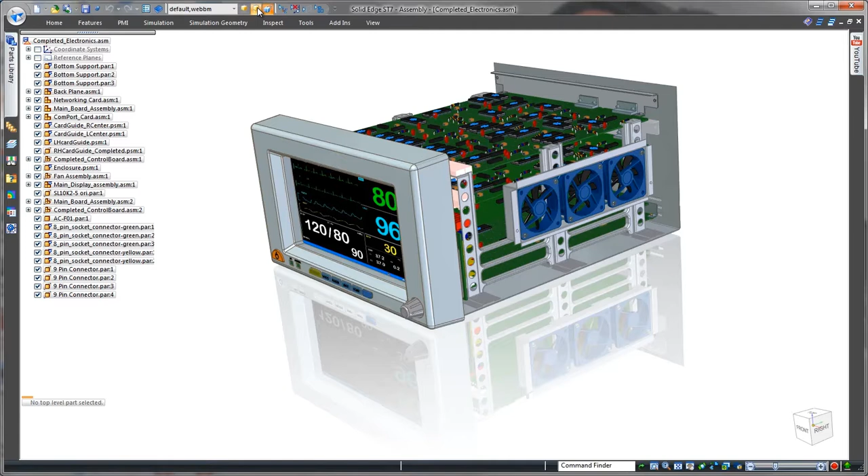We'll use Solid Edge to complete the enclosure of this heart rate monitor. Solid Edge with synchronous technology excels in sheet metal construction, allowing designers to efficiently work with surrounding components to define external product housings. In most CAD systems, the user has to modify a part independently from the overall product assembly. With Solid Edge, additional flanges can be created at the top-level assembly just by selecting and dragging the plate's thickness faces. No special command necessary.

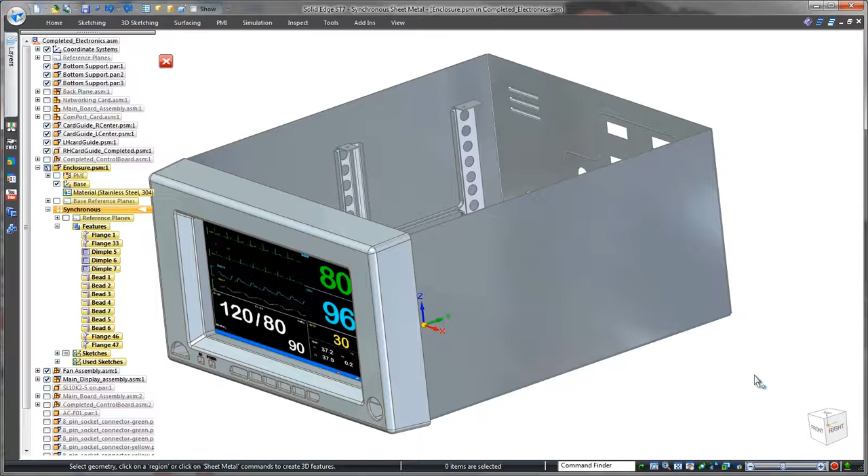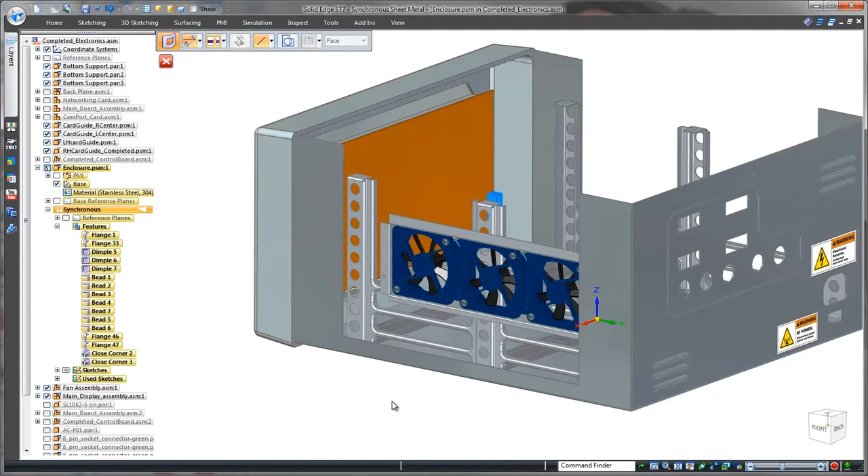Medical device manufacturers must adhere to strict government regulations, and any gaps between panels could be faulted. Using the Close Corner command, these gaps are eliminated. The internal circuitry produces a large amount of heat, so normal operation of this monitor relies on cooling fans. To provide clearance for airflow, we'll define rectangular cuts on both sides of the enclosure. Synchronous modeling provides several methods to intuitively match the size of these openings to the shape of the fan assembly. Now that was fast and easy.

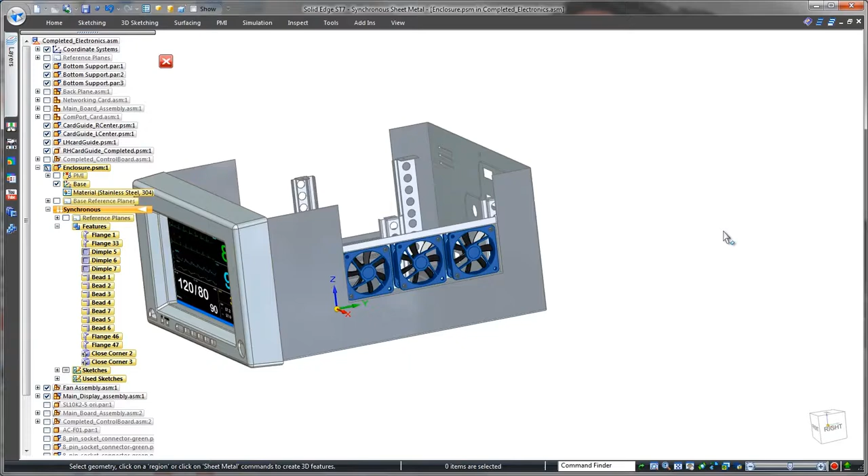Next, we need to create a locking tab for the enclosure's lid. Here we'll select the thickness face, but opt for a partial flange to create this tab. Using one of many handy options, we'll ensure its top is flush with the top of the part. We'll lock in a precise tab location using 3D dimensions. To meet safety requirements, simple rounds will remove sharp corners.

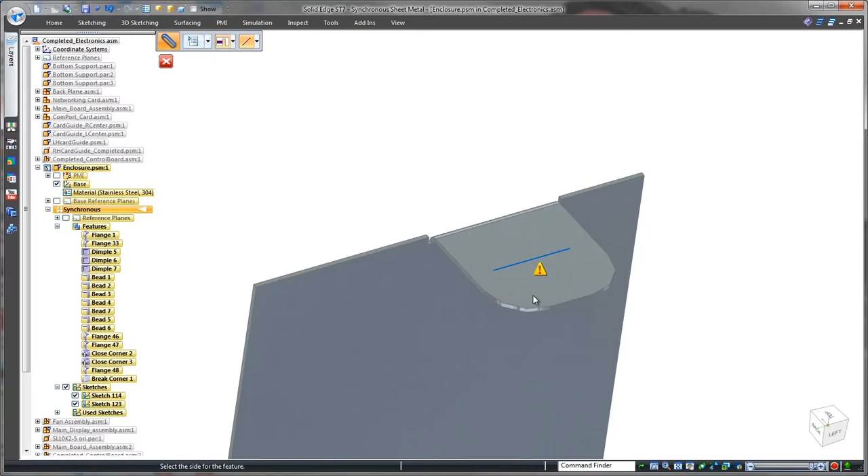The locking tab requires a starting slot, and Solid Edge needs only a sketch line to create the slot. We'll place a hole in the slot to complete the locking tab. We get the required clearance between the top of the locking tab and the lid by pushing the tab's top face deeper into the part.

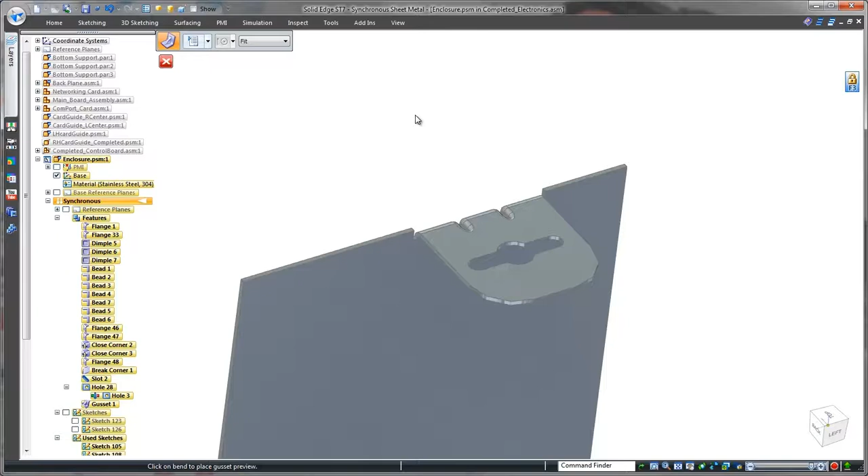Another modification made easy. The locking tab needs to be stiffened, so we'll use the gusset command. Simply specify 2 gussets and Solid Edge automatically computes the spacing between them. Since an identical tab is needed to lock the lid on the opposite side, we'll quickly fence select and mirror these features to the other side. This completes the design of the enclosure's base.

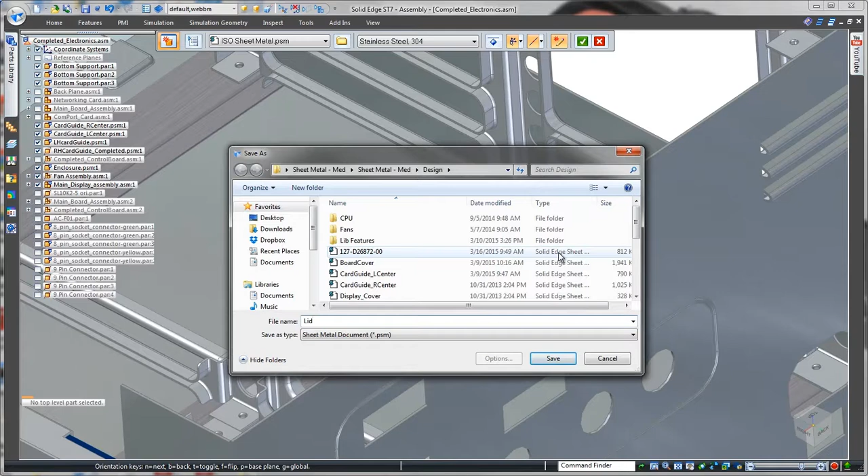Now we'll create the lid. This is where the power of Solid Edge top-down design is realized. By constructing our housing in the context of surrounding components, we can ensure all holes align and mating parts match the first time, avoiding costly rework and eliminating scrap. As before, we'll create a new flange just by dragging the lid panel's thickness face to the length we need.

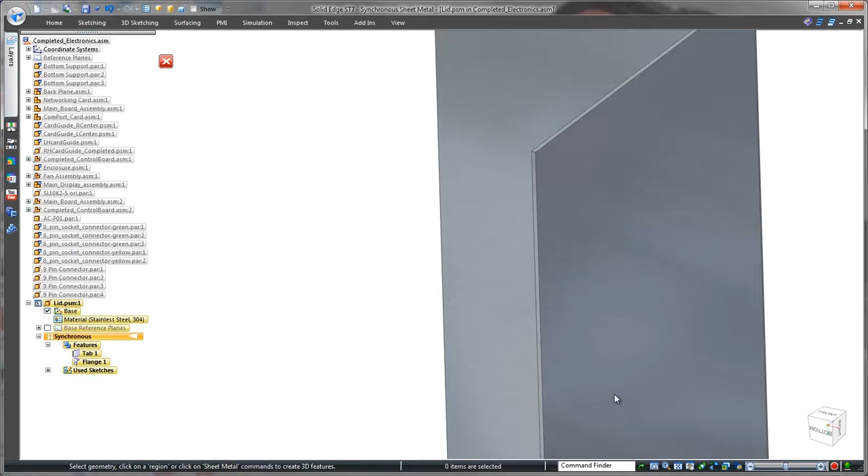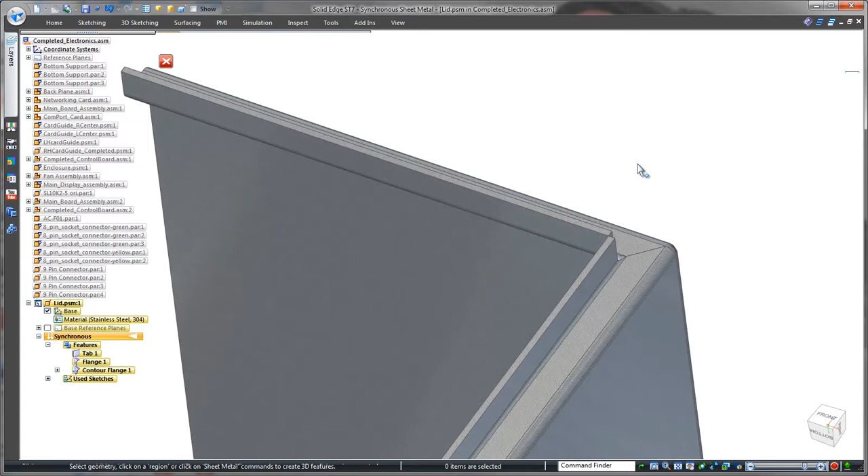On the front of the lid, we need a flange that wraps to the underside of the control panel. The Contour Flange command not only creates a more complex flange that will fit just right, it also allows us to close the inside corners too. Notice this bend radius doesn't match the rounded corner of the control panel. No need to access the history tree, just select the bend and change the radius. Again, that was easy.

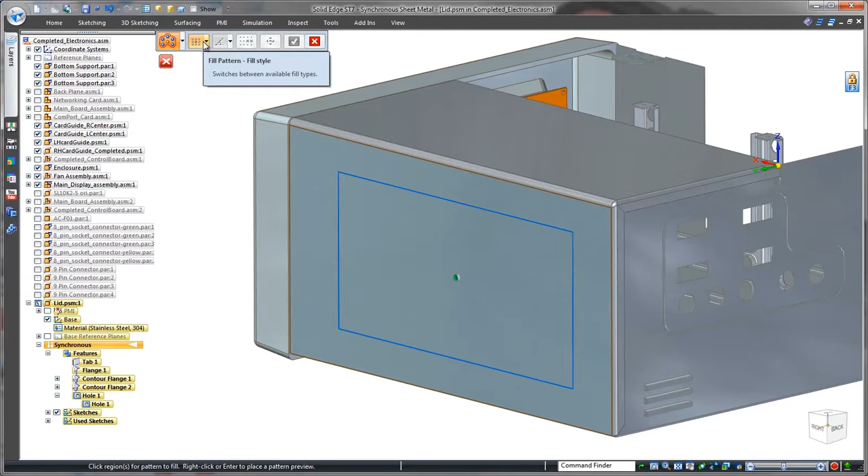Remember the fans? Proper operation will require a vent on the side of the lid. We'll create this vent by sketching a rectangle to define the vent's extent and patterning a hole using the fill option. It's as simple as that. Notice that we have an interference problem between the lid and the front of the control panel. Applying a synchronous relationship will move the vertical flange flush with the control panel's thickness face. That was an easy fix. We'll finish the enclosure by mirroring this lid half around the thickness face of the part.

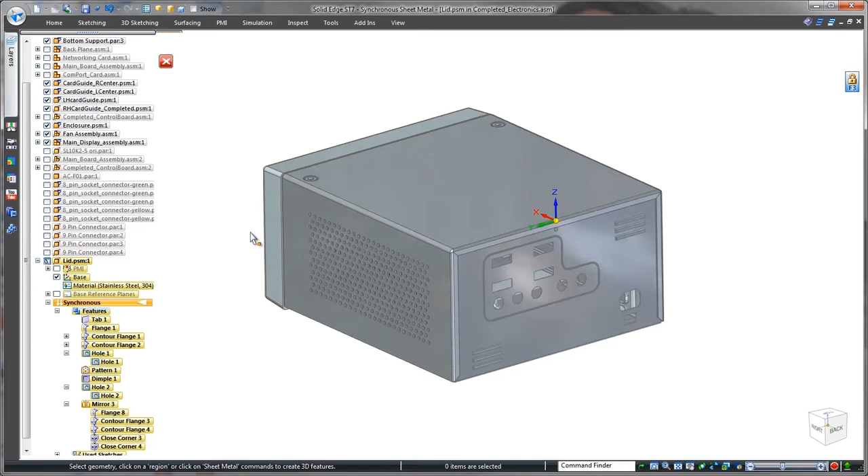Solid Edge facilitates creation of manufacturing information, often with little user intervention. Watch as we automatically derive a bend table from the lid model. Finally, we'll generate a flat pattern for use in a downstream manufacturing drawing. In this case, we'll insert the bend table and add a few coordinate dimensions.

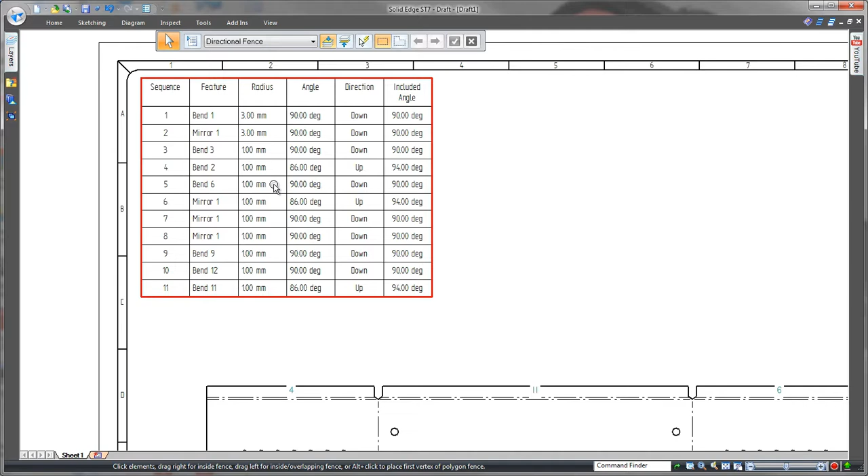Direct interaction with surrounding geometry, coupled with industry-leading sheet metal design tools and innovative modeling capabilities, makes Solid Edge the choice for companies looking for an edge over the competition. Solid Edge. Design better.